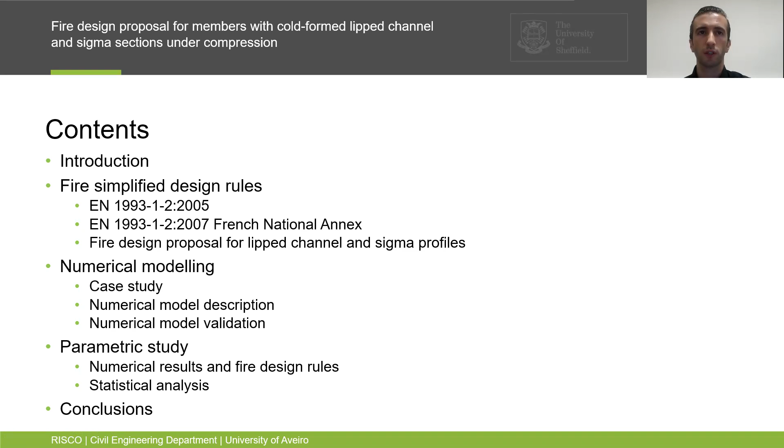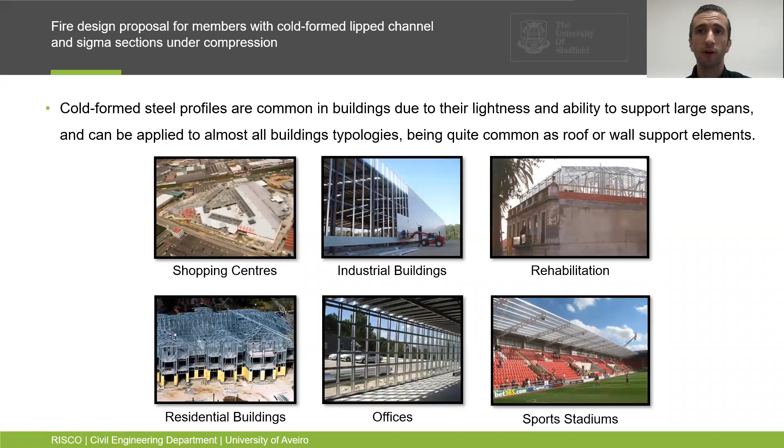Starting with the introduction, cold-formed profiles are used due to their lightness and ability to support large spans. Currently, there are several applications of these profiles as roof or wall support elements in different building types, such as shopping centers, industrial buildings, structural repair and rehabilitation, residential buildings, offices, and sports stadiums. Its application is quite common in buildings with a high occupancy rate, which have higher fire resistance requirements due to the greater risk of human losses.

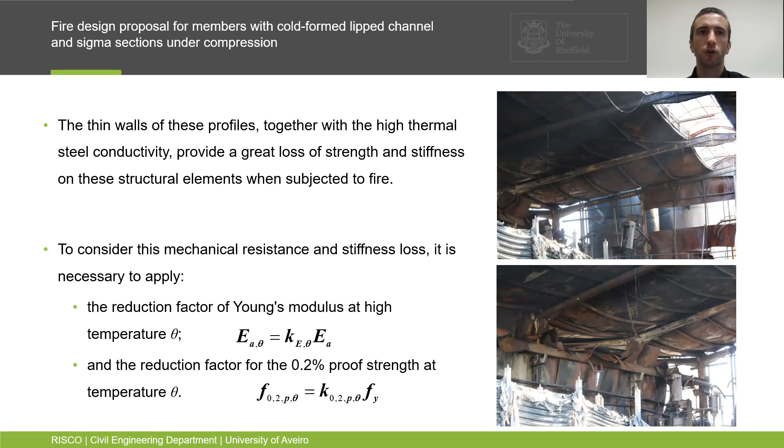Since steel has high thermal conductivity, when subjected to high temperatures, mechanical properties start to deteriorate from a certain moment, leading to a loss of strength and stiffness, which means we have to consider the reduction factors of the Young's modulus and 0.2% proof strength.

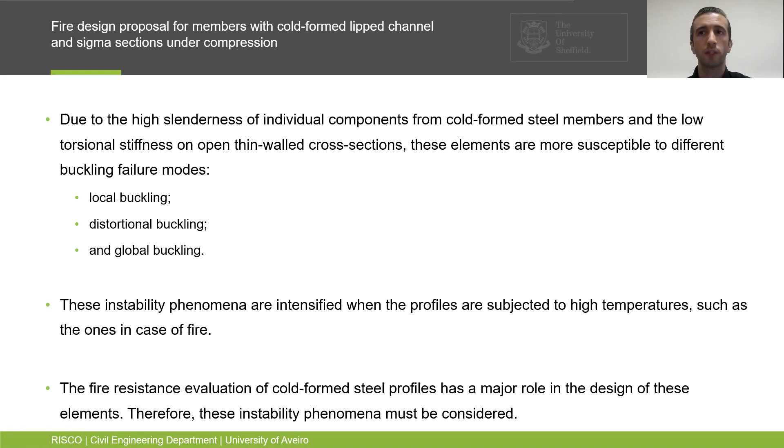These profiles present specific characteristics which lead to local, distortional, and global buckling phenomena occurrence. At elevated temperature, these instability phenomena are intensified, which means they should be considered in the fire resistance evaluation.

This research is about the behavior of simply supported columns with cold-formed steel lipped channel and sigma cross sections in case of fire. Different parameters like slenderness, steel grades, and elevated temperatures were considered.

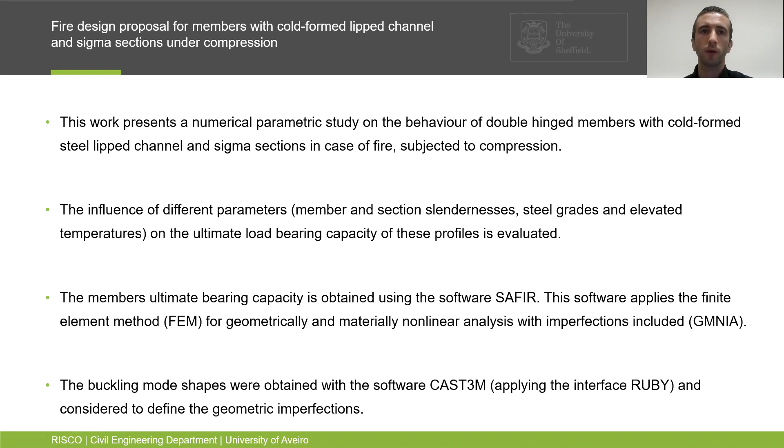With the SAFIR finite element software, the fire resistance of cold-formed steel lipped channel columns was numerically obtained, and the buckling mode shapes obtained with the software CAST3M were used to define the numerical model's geometric imperfections.

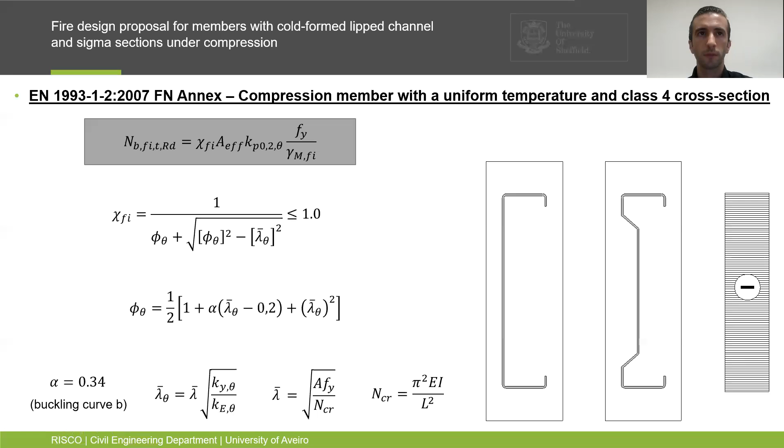However, the French National Annex from the same part of Eurocode 3 presents a similar expression while considering a constant imperfection factor.

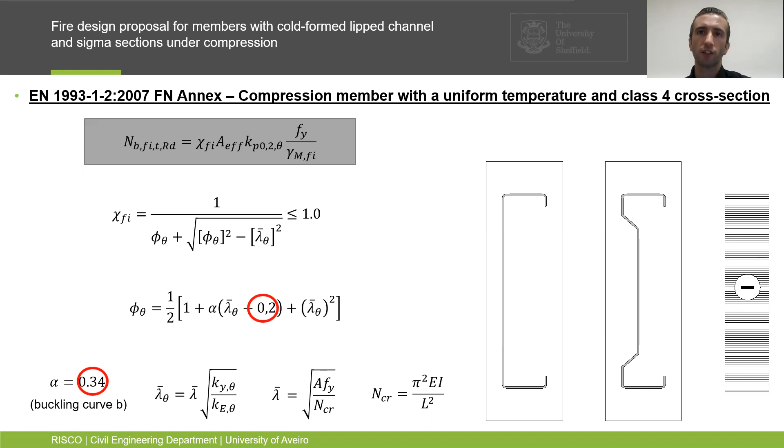The effective cross-section was obtained according to Part 1.3 of the same Eurocode, with the local instability mode determined according to the method of effective width, and the distortional instability mode determined by the reduced thickness method.

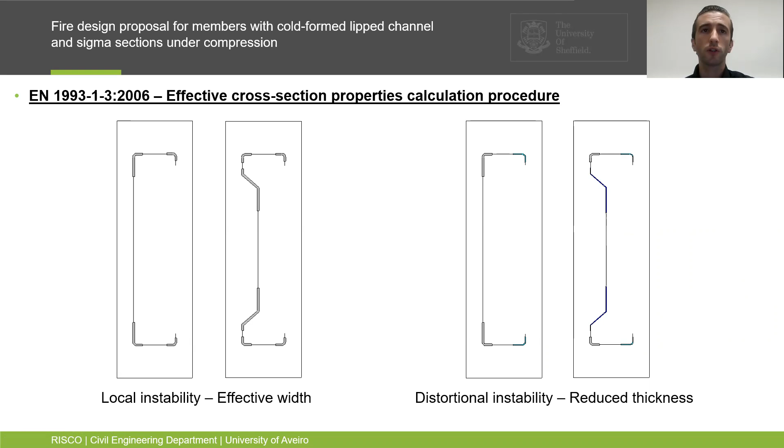For not doubly symmetrical cross-sections, the actual load will be eccentric. Therefore, the additional moment should be taken into account.

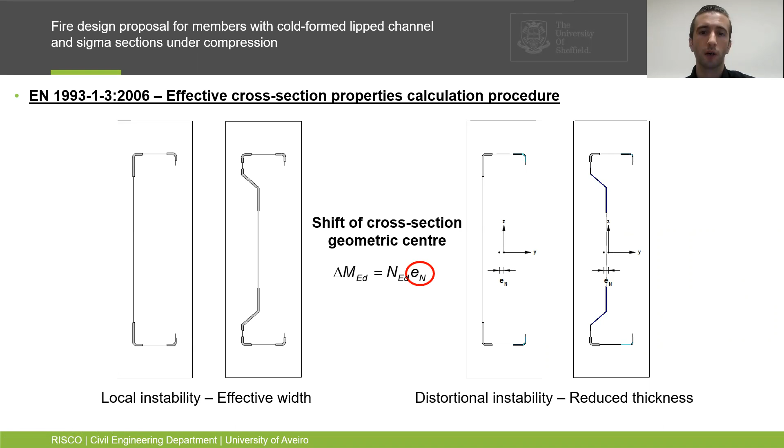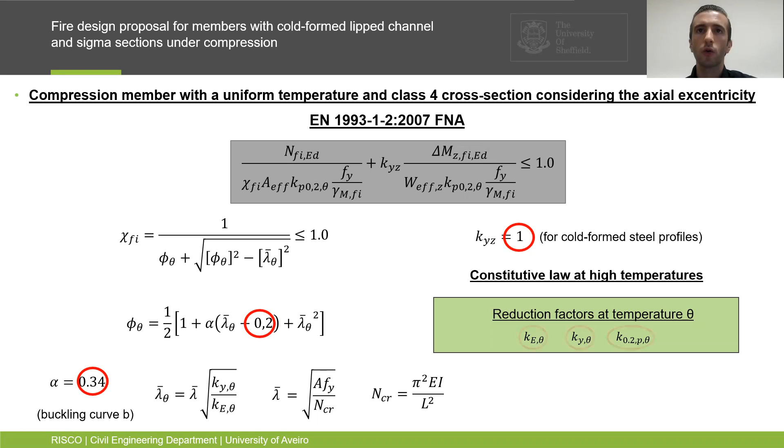These were the equations applied in this work to consider the load eccentricity, along with the corresponding equations from the French National Annex, which include more simplistic considerations, such as considering all interaction factors equal to 1, and a constant imperfection factor. It also presents lower reduction factors when compared to the reduction factors from the general Eurocode.

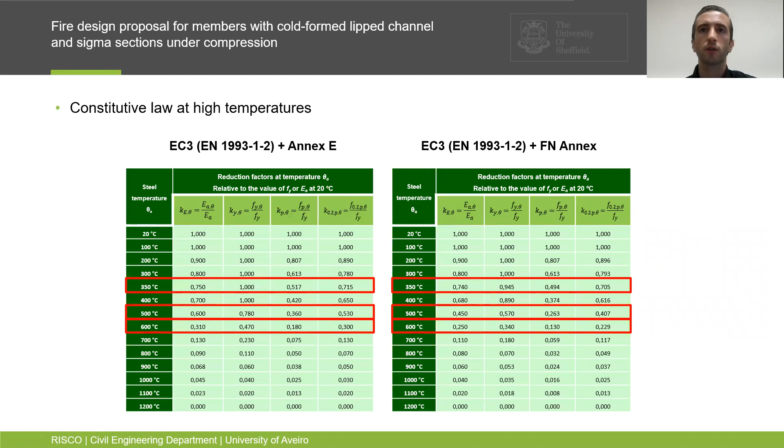Here I present the different steel constitutive laws according to the respective annex, where the French National Annex presents reduction factors with lower values. As you can see here, in this case for 350, 500, and 600 degrees.

This new proposal is based on an adaptation methodology for flexural buckling on cold-formed steel elements, where the equations considered in this new design proposal remain the same as Part 1.2 of Eurocode 3, considering the use of interaction equations with the flexural buckling curve of the French National Annex and a new imperfection factor as a function of the cross-section shape.

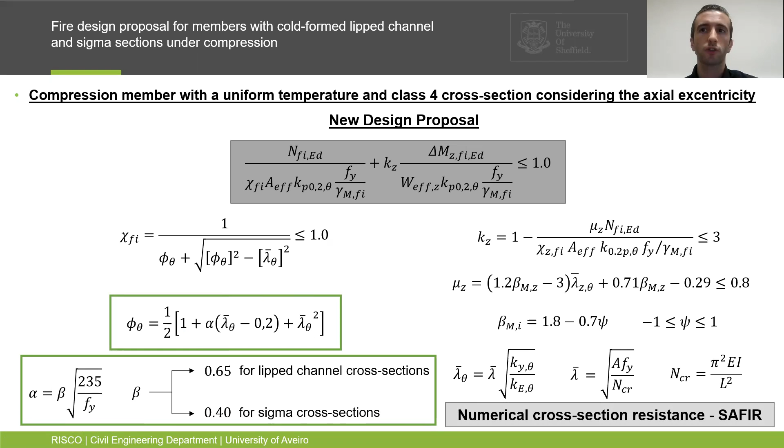In this work, the cross-section resistance was obtained numerically with the SAFIR software and considered in the analysis.

Now presenting the numerical modeling: cold-formed steel columns for 10 different cross-sections, 7 lipped channel and 3 sigma sections, under 3 different high temperatures were considered.

The choice of the temperature 350 degrees is related to the recommended critical temperature for profiles with class 4 sections when no calculation is made, with the other temperatures chosen for being common critical temperatures in this type of structural element. Different member lengths were also analyzed, with lengths between 1 and 10 meters, considering this slenderness range, 4 different steel grades, and a uniform temperature was considered.

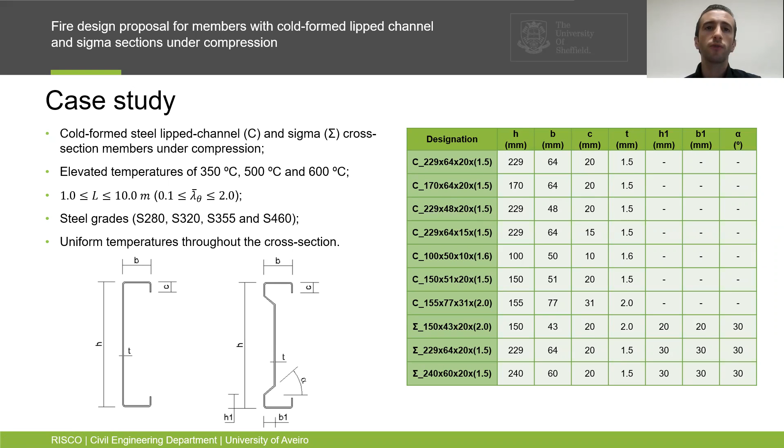Shell elements with 4 nodes, each with 6 degrees of freedom, 3 translations and 3 rotations, applying the finite element software SAFIR, were considered. The mesh was refined at the corners to reproduce the rounded shape, simply supported at the ends.

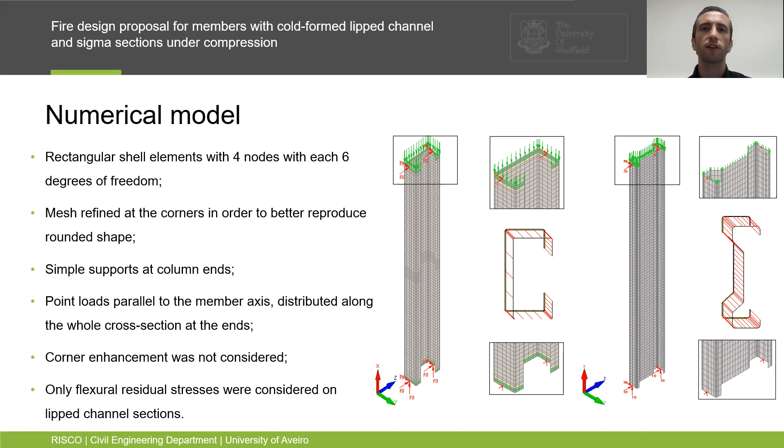The loads were applied parallel to the member axis at the ends according to the linear stress distribution presented. This study did not take into account the corner enhancement resulting from the manufacturing process, and only the flexural residual stresses were considered.

Geometric imperfections were considered with the buckling mode shapes obtained with CAST-3M and the Ruby interface. The amplitude of the local, distortional, and global imperfections were 80%, according to Part 1.5 of Eurocode 3, from those recommended by Part 4 of EN 1090.

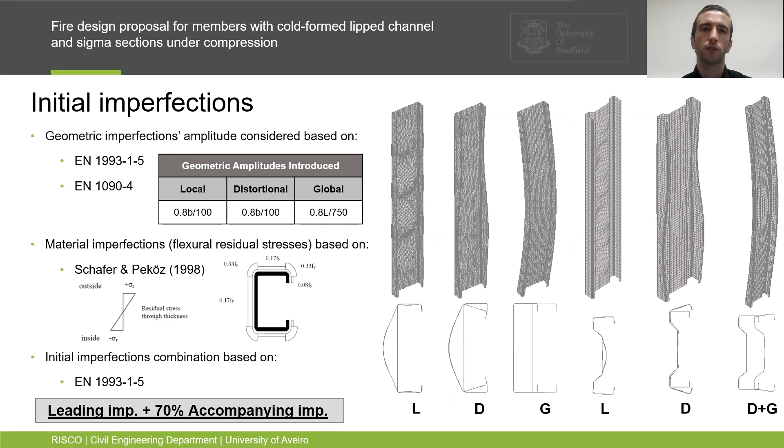The flexural residual stresses were based on Schafer and Peköz, according to the diagram presented. Also, according to Part 1.5 of Eurocode 3, to combine these different geometric imperfections, as well as the material imperfections caused by residual stresses, a leading imperfection should be considered, with the total amplitude, and the accompanying imperfections with 70% of its value.

To validate the numerical models, 12 simply supported columns were considered, heated with the ISO 834 curve. Two different constitutive laws, from the current Eurocode 3 Part 1.2 and from the French National Annex, were studied in the numerical analysis.

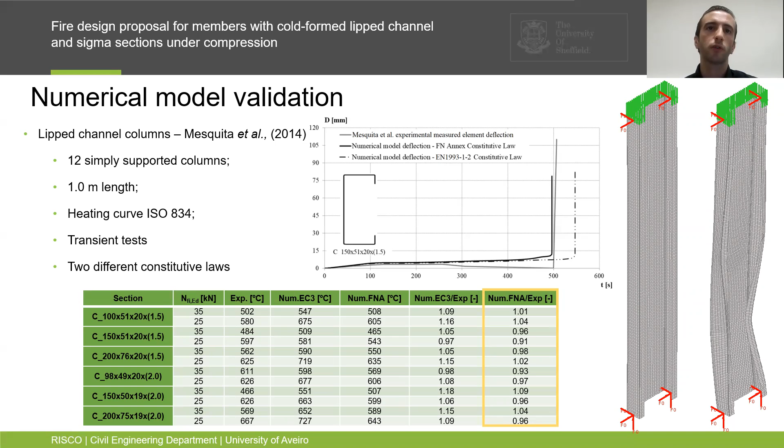The conclusion is that the French National Annex constitutive law provides a better approximation to the experimental results and also safer results. Now presenting the numerical results obtained with SAFIR and the different fire design rules.

Here 4 different cross-section slendernesses are presented. As it is possible to see, the current design rules are conservative. However, the French National Annex presents design curves less conservative, or unsafe in some cases, and the new proposal fits better to the numerical results.

Varying the temperature, no visible differences are presented between the numerical results, and related to the different design methodologies, the same conclusions are observed.

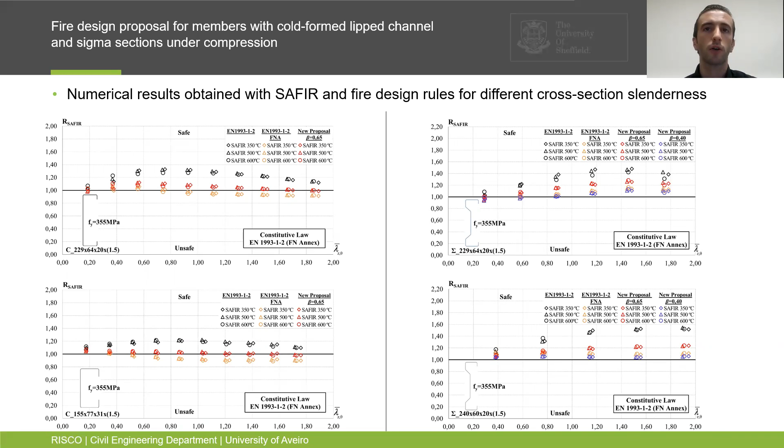Here, the results, considering the different steel grades, the same conclusions are obtained. The influence of different steel grades is visible. Considering a low steel grade, the numerical results are far from the Eurocode 3 rules, with the approximation improved when the steel grade increases.

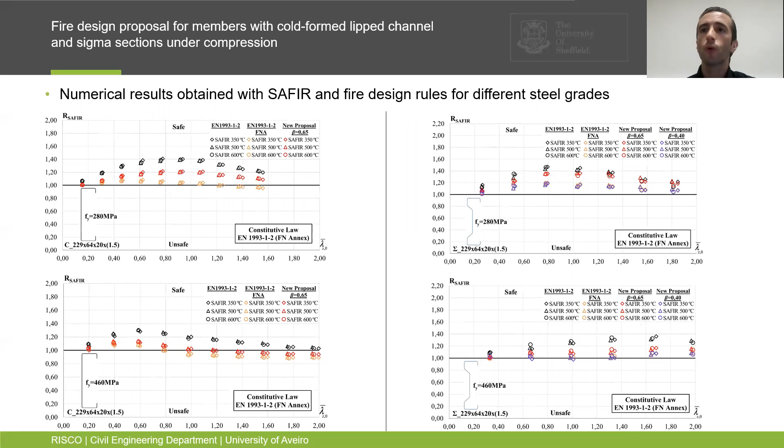The current Eurocode 3 rules are still over-conservative, but the French National Annex tends to be increasingly insecure for the results. The new proposal balances, once again, this difference, being often on the safe side, where unsafe results only occur for the limit range of steel grade.

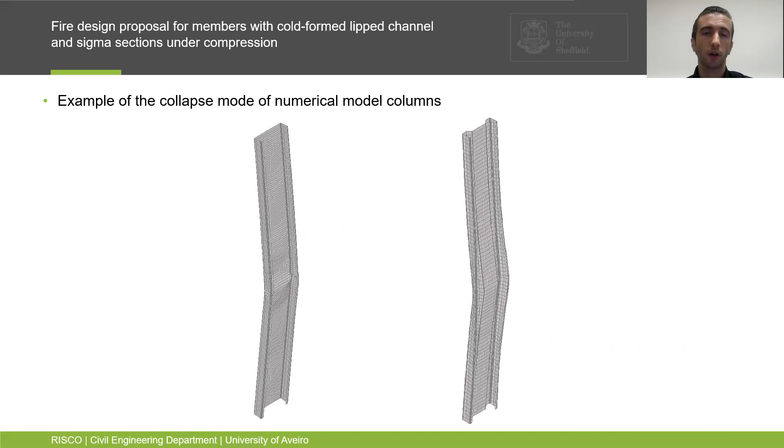Here is presented the failure mode obtained from the tested columns. For a detailed analysis of the obtained numerical results, a statistical evaluation of the methodology is presented.

Following the three criteria of the validation procedure proposed by Kruppa, it is possible to observe that the current methodology is too conservative without unsafe results. The French National Annex seems to present a better agreement, however, with significant unsafe results for lipped channel columns.

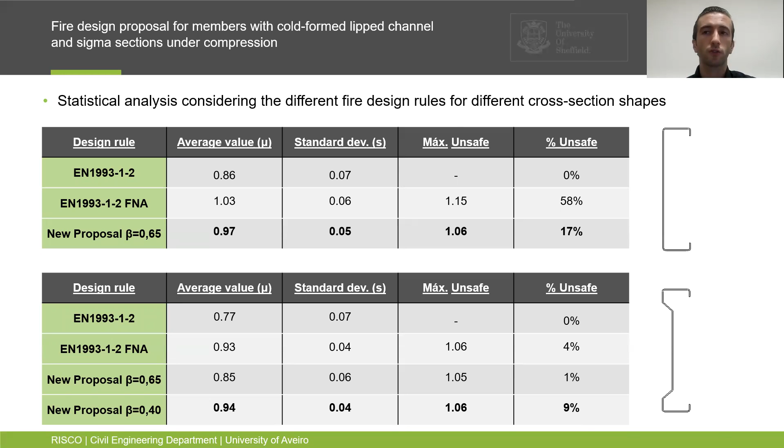The new proposal presents average values closer to 1 and lower standard deviations, proving to be less conservative and safe at the same time.

To finish this presentation, the behavior of double-hinged columns with cold-formed lipped channel and sigma sections in the case of fire was presented with a parametric numerical study.

Lipped channel numerical models were developed for the studied cases and validated against several fire tests from the literature. A comparison between the ultimate numerical loads and the fire design formulae prescribed in Eurocode 3 was performed.

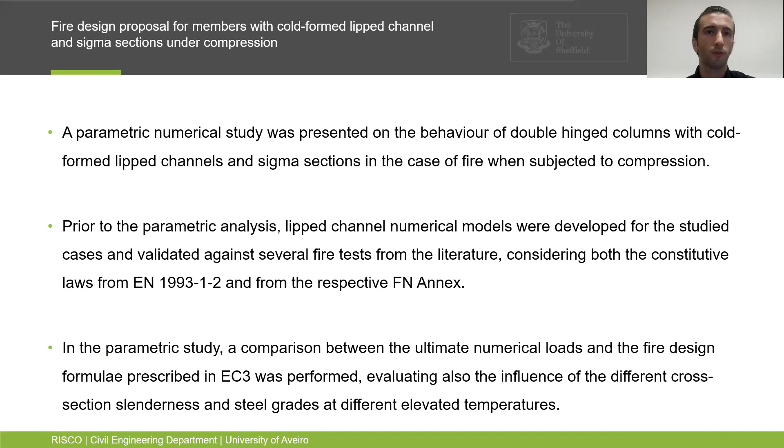Regarding the columns' fire resistance, the current design rules demonstrated to be generally over-conservative. The steel grade affected the resistance of the tested profiles significantly enough to be considered in the calculation formulae. The design rules of the French National Annex were in better agreement with the numerical results.

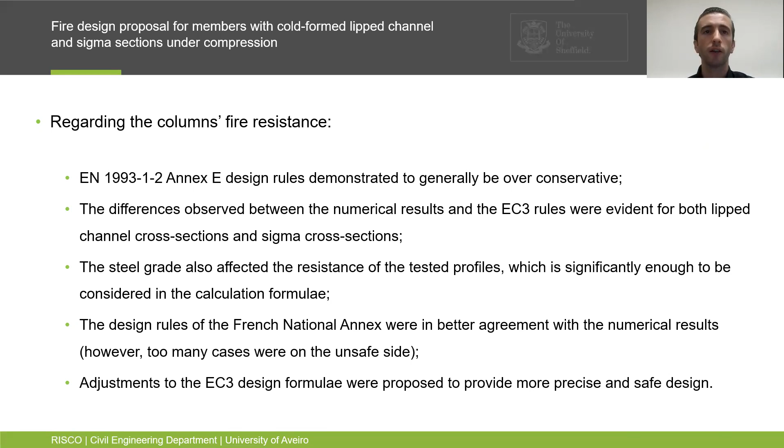However, too many cases were on the unsafe side. Adjustments to the Eurocode 3 design formulae were proposed as an adaptation of the existing rules, covering a high number of cases in a less conservative way while maintaining safety.

Different imperfection factors for the lipped channel and sigma sections were proposed. When the imperfection factor depends on the yield strength, it is possible to observe a better agreement with the numerical results of different steel grades. The numerical results demonstrated the importance of this adjustment, crucial for the Eurocode curve's accuracy.